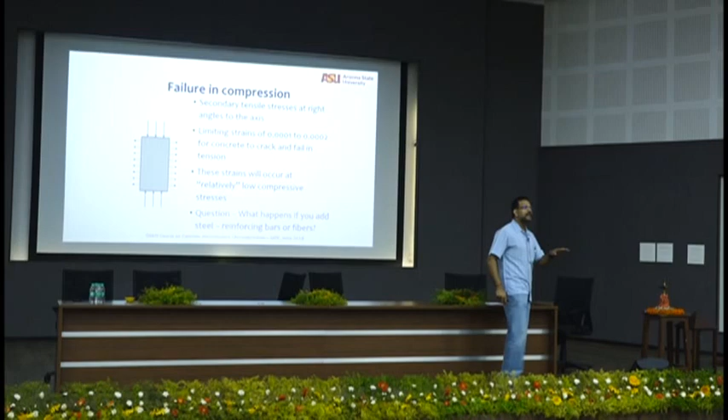Failure is not an average, so you don't say that. You say 'I failed in this course,' you don't say 'I failed in the semester.' If you have 8 courses and fail in only one, you fail locally. Some people have the talent to fail globally, but generally you fail locally, one by one. Then you fail this semester, next semester you have additional load to study, and the chances are you fail more because of that additional load. Same process happens. So failure is a local phenomenon, and that leads to my next point.

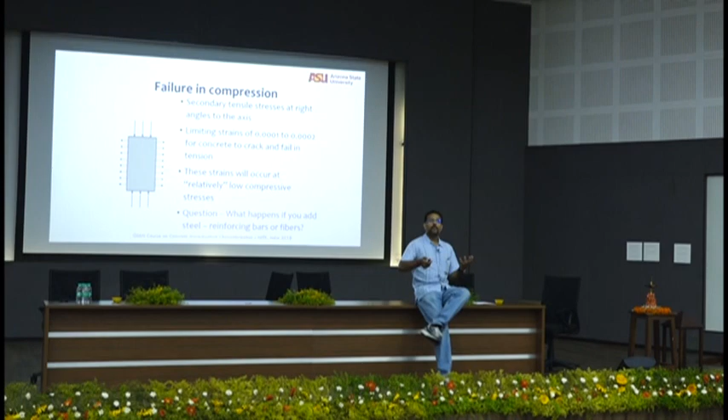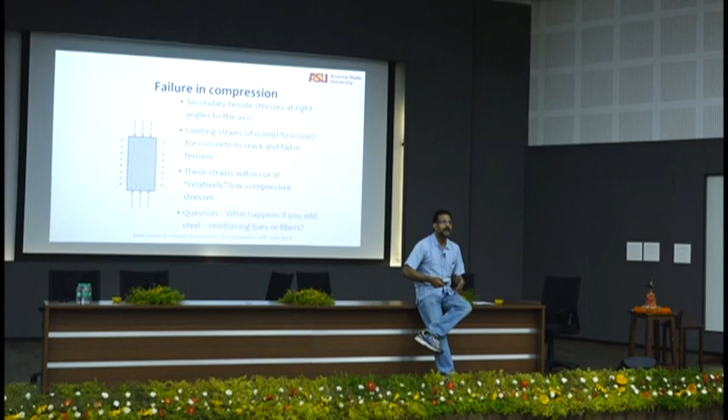Reinforcing bars or fibers are local strengthening agents. Fibers especially are local strengthening agents. What happens is micro cracks form in concrete. What a steel fiber will do is carry the load, disperse it so that the crack will not open and widen further. You will have an initial crack, but the fibers will start to carry the load instead of the concrete carrying the load. So understand this important point: failure is always local.

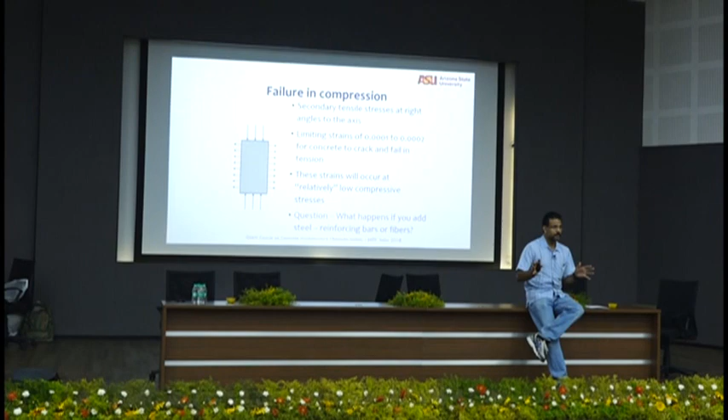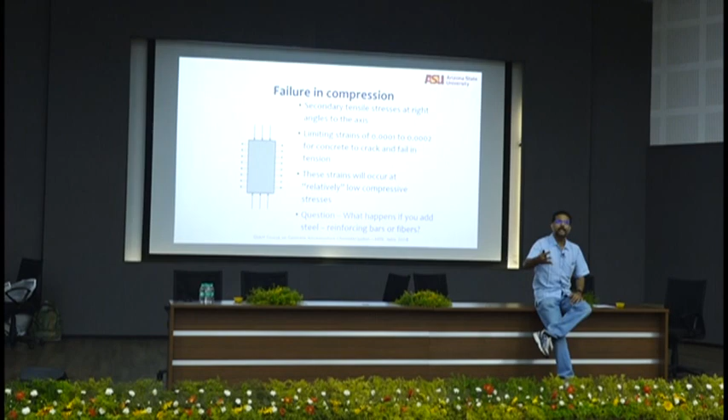Failure is never global, failure is local. Several localized failures coalesce to give what we perceive to be a global failure. And you cannot design for a global failure, therefore you have to design for a local failure, meaning controlling things at the local scale.

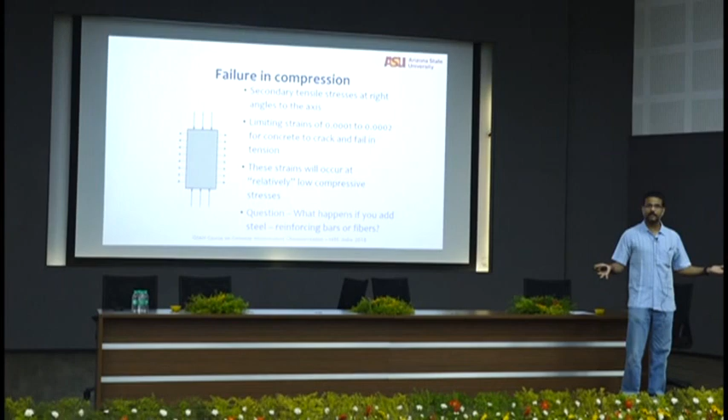What is local as far as concrete is concerned? If I look at concrete with my naked eye, what is local? Aggregates and cement paste. If I look at cement paste under a microscope, what is local? CSH and calcium hydroxide. If I look at CSH further under a transmission electron microscope, what is local? The layers of CSH. The definitions of local and global change.

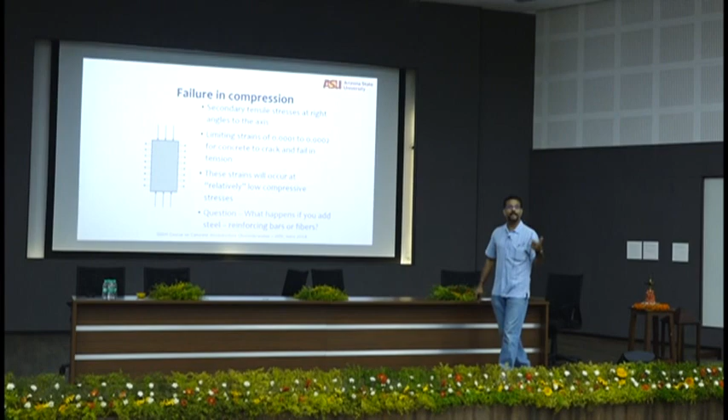For the government sitting in Delhi, the whole of Karnataka is local. For somebody in Bangalore, Mangalore is local. For somebody in Mangalore, this little part is local. Local and global depends on how you look at it. But failure is always local.

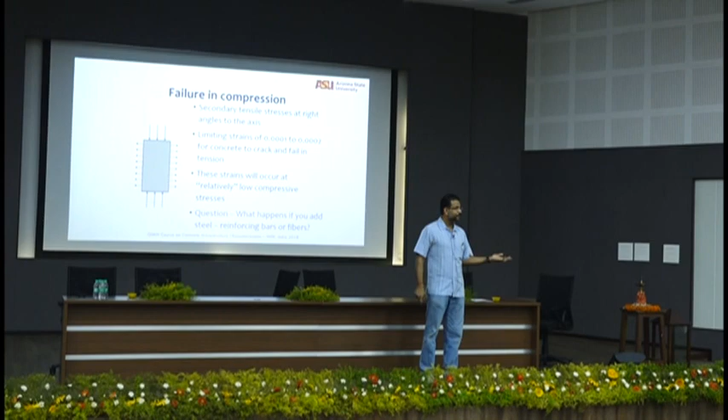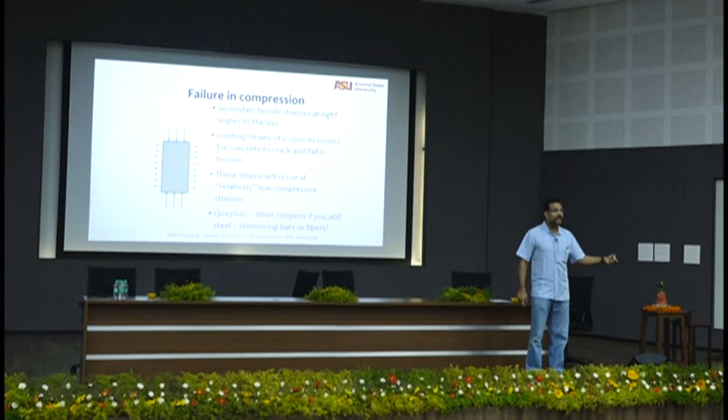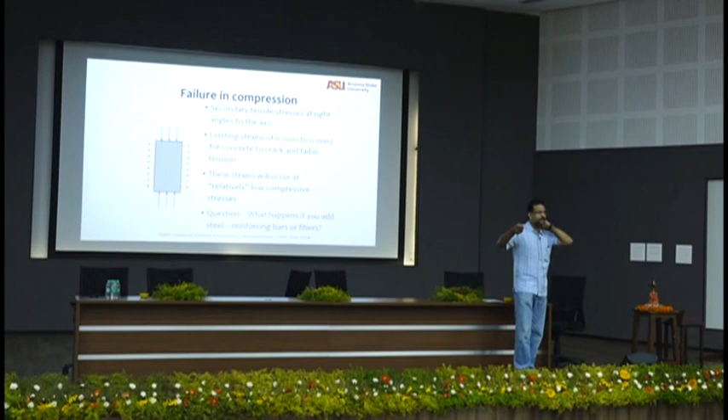So the more detail you can go into, the better you can capture the reasons for failure. Nobody really captures the reasons for failure. You'll see consultants come and look at a bridge deck and explain how it failed. They're all hypothesizing, and because they know a lot from history, they might be correct most of the time. But if you don't truly know what it is, you can't just say 'this is how it failed,' because failures are always local.

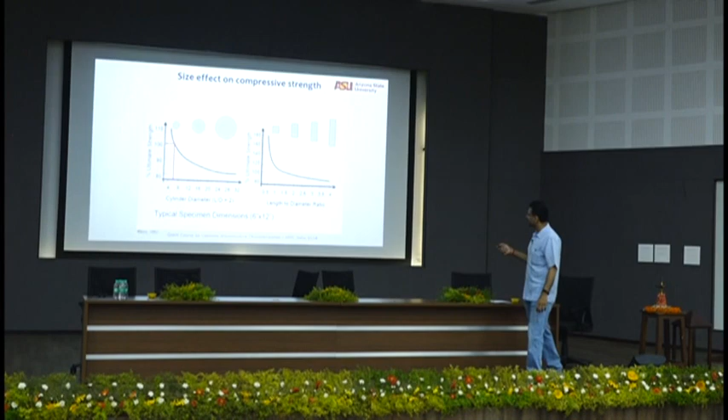Size effect on compressive strength: the larger you make your specimen, the weaker it gets. So your best option is to make a really tiny cube. What is the reason for that? Why does a 300 mm cylinder or cube show a lower strength than a 150 mm cube, which shows a lower strength than a 75 mm cube?

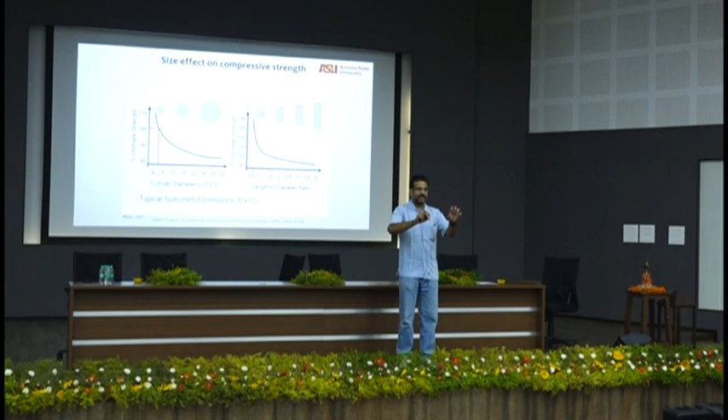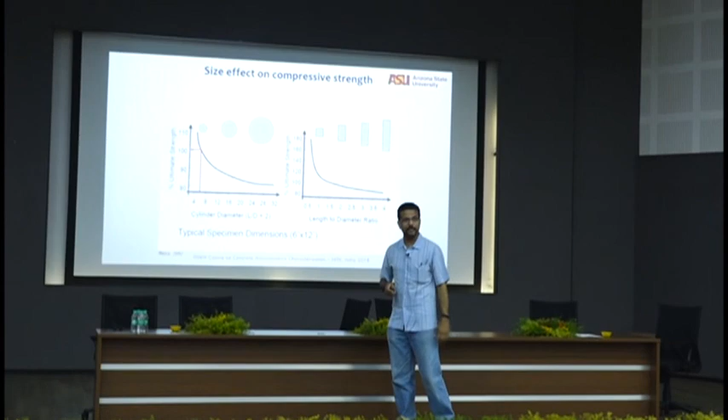Material defects. When you make larger and larger materials, the chances you have defects in that material are larger. If I could theoretically take atoms and connect them all together properly, I should have no size effect at all, and I should have the highest strength for that case, but that doesn't happen.

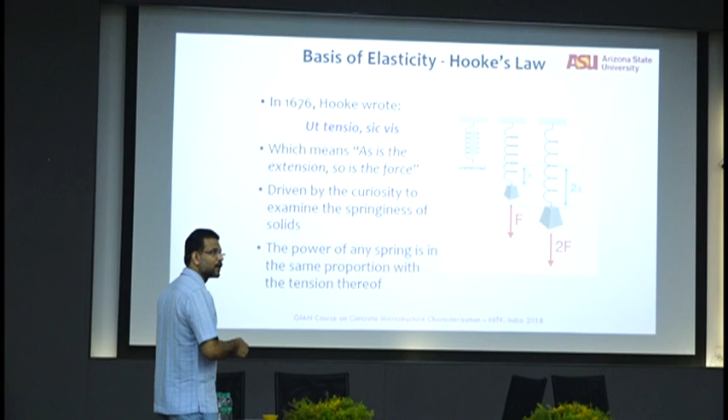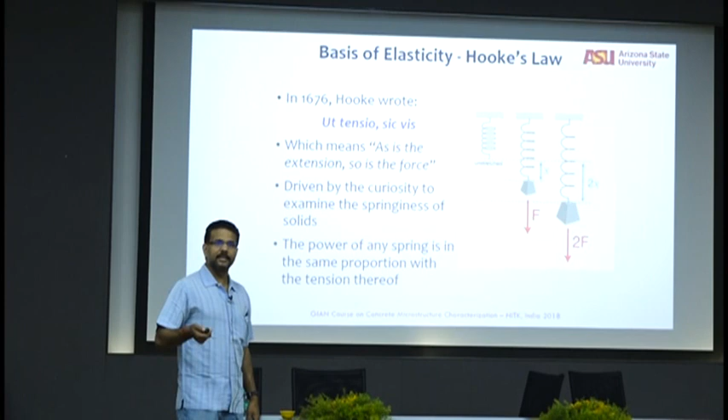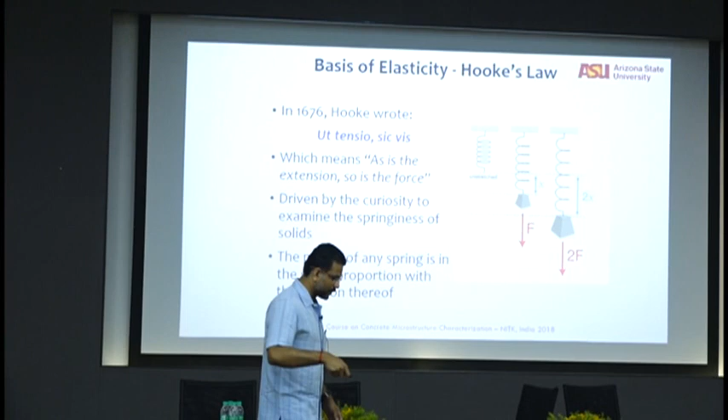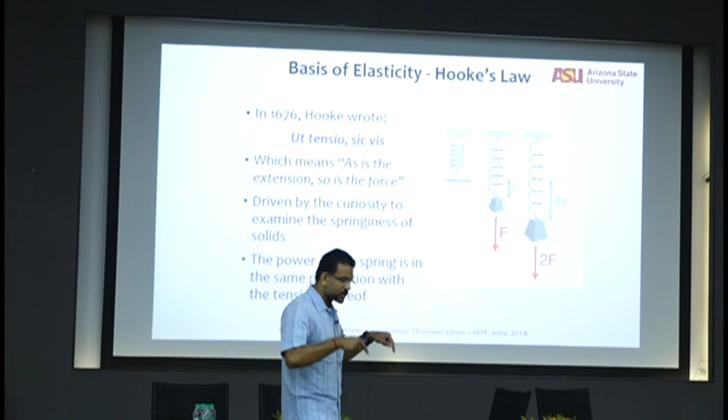Even when I say I am applying a load on this floor, I am not applying a load — because of my standing here, the floor is deforming, and because the floor has certain rigidity, it wants to oppose the deformation. That is the stress you see. Opposing the deformation is the cause of stress, not applying stress.

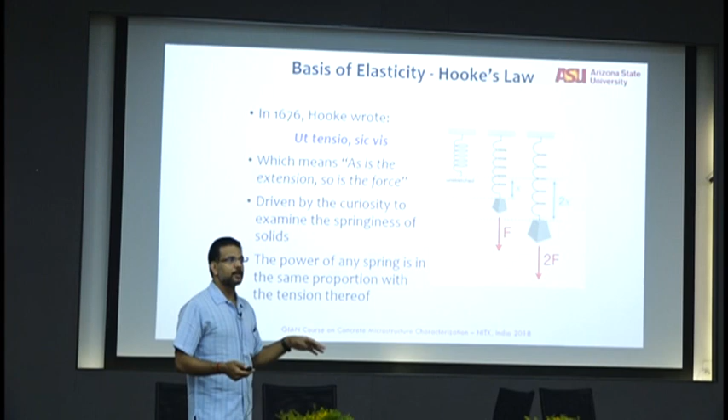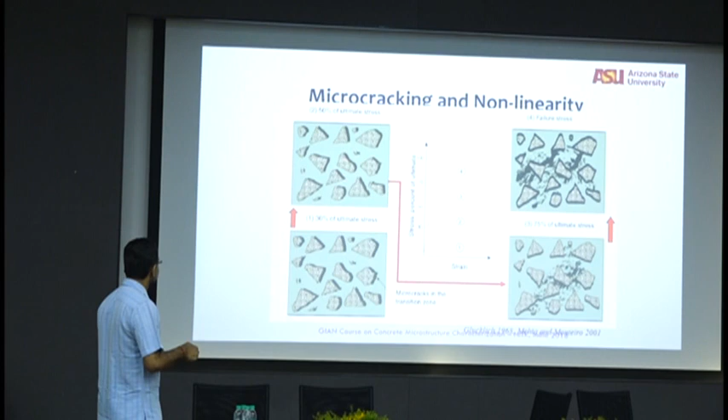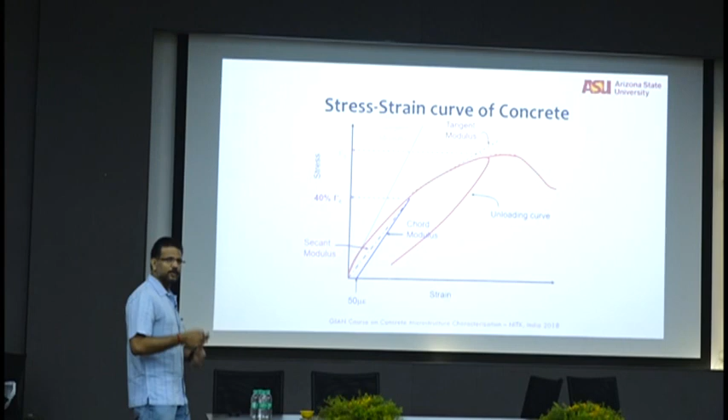Just some basic ideas so you don't mess it up anywhere. Again, you would have seen these pictures at a very low level. Even at the start, you have some micro cracks. Micro cracks start to expand, they become connected cracks, and failure occurs with a lot of these connections. You've seen these pictures over and over again — the stress-strain curve of concrete. All of you know secant modulus, tangent modulus, chord modulus, all the simple boring stuff.

Composite models for concrete — I'll give you these notes. These are just mathematical comforts that you can have.

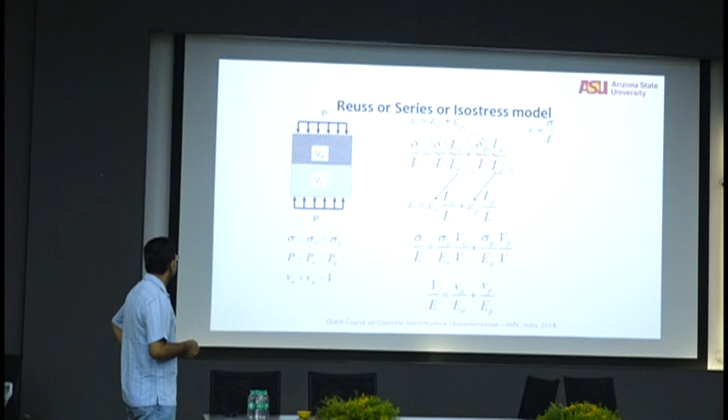Refined composite models. You can do a lot of nice models for concrete. Some of them work well.

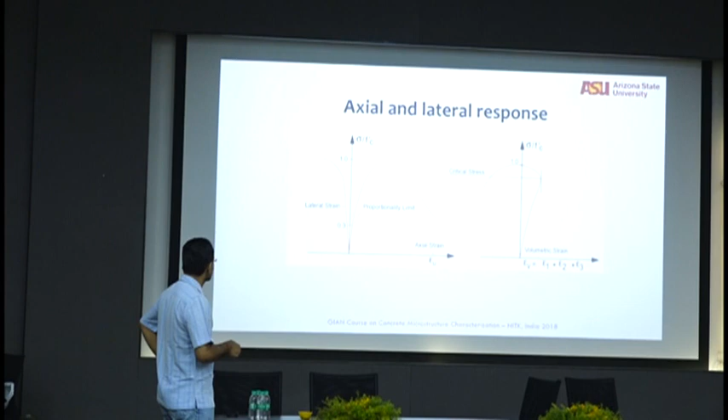Okay, axial and lateral response. So load versus axial strain gives you this curve. This is your proportionality limit, so look at how much nonlinearity you have. And this is your lateral strain. So lateral strain over longitudinal strain at the same stress level will give you your Poisson's ratio, as long as you are in the linear elastic range. So somewhere here, that's your Poisson's ratio.

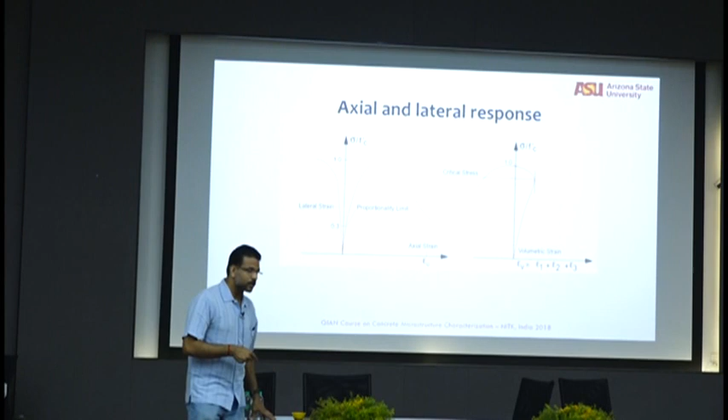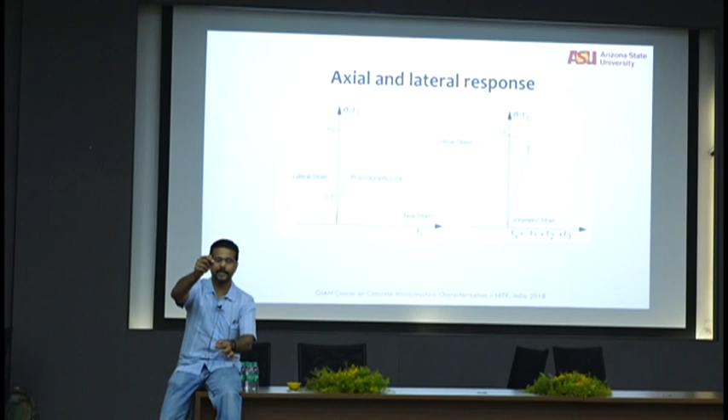Volumetric strain - I talked about strain being in volumes. When you measure strain, you measure a length change. You take it to the lab, put it under an extension comparator, and measure the length change. But in real life, concrete is a three-dimensional material, and when you push, you have strains in other directions also. Therefore, volumetric strains are more important. Volumetric strain is a sum of the strains in three orthogonal directions, not a product of the strains.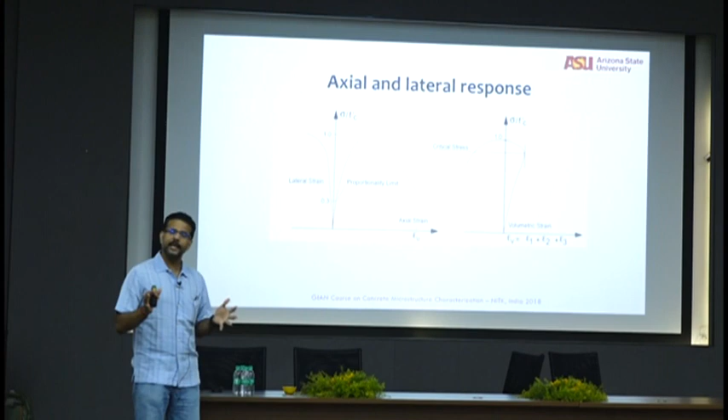So if you measure strains in x, y, and z directions, volumetric strain is the total additive value of all three strains, because volumetric strain is very important in shrinkage in real life - it's shrinking in all directions. So you have to look at volumetric shrinkage strain rather than linear shrinkage strain, because depending on the surface area to volume ratio, shrinkage in all directions might not be the same. So you take a linear strain, you might get some kind of an indication, but you will have strains in other directions also.

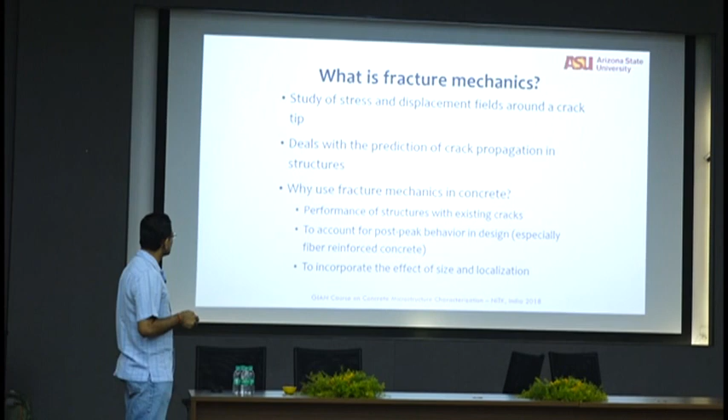Envelope of tension compression, testing for tension. I'll do a quick bit of fracture mechanics for concrete. Basically, what we rely on all the time - I'm not trying to say one method is better than the other. So there are people who are continuum lovers and people who are fracture lovers, and there's always a conflict between the continuum guys and the fracture guys. The continuum guys say that this is all a continuum, you can apply the uniform laws of physics to all of this and get it done, and that happens most of the time.

The fracture guys say no, failure is local. If failure is local, you have to account for local failure, and the local failure will have to dictate what stresses you have. Sometimes they converge, sometimes they diverge dramatically. There are certain cases - for example, if you do an aerospace composite design for an aircraft or a rocket, you always do a fracture-based design, because failure is local and that failure can cost very much. If you're doing a bridge deck or a road, forget it, cracks, move on. We know concrete cracks. I have a lot of these admixture companies manufacturing crack sealants - all these companies manufacturing hundreds of products that you can throw into all these cracks and seal the cracks and all of that. So move on, we wouldn't worry about it.

Again, it's a question of what the criticality of your problem is. Sometimes you want it to be a little bit more involved. So if you're doing fracture mechanics - typically when you say I apply a stress, when the stress exceeds the strength, the material fails, very simple: stress, strength, stress, strength. Whereas when you get to fracture mechanics, you say no, I apply a stress, I have no idea of strength, because I cannot say a strength, because strength changes from point to point. So when I say there is a certain strength, it applies to only that point. When you exceed that strength at that point, I fail there.

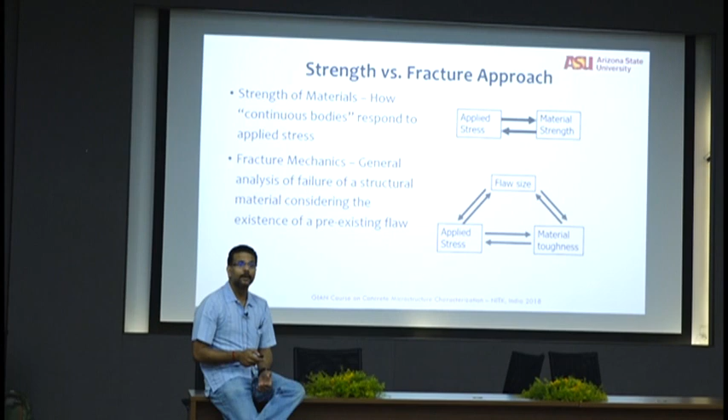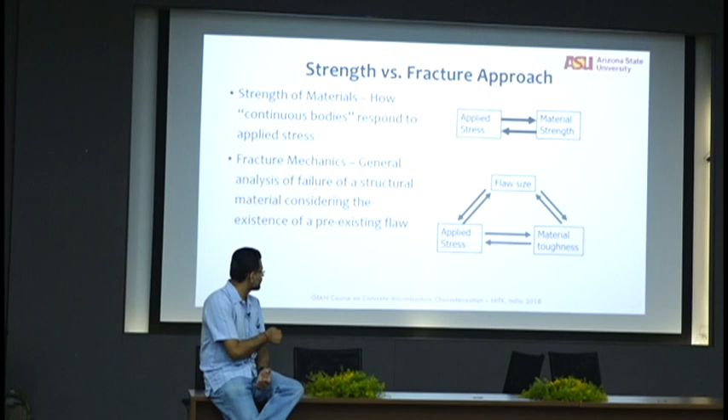So the global strength has no meaning. What you have is a material toughness. Toughness is a capacity to absorb energy - that is what is more important, and then the size of the defect. The larger the defect, the faster the failure; smaller defect, slower failure. So you have now a relationship between these three things when you do fracture mechanics.

The idea is crack size - you start with a certain design strength, and this is very common in concrete. You start with a certain design strength. After some time, you get here, like your director was saying on the first day - after some time, cracks increase and your strength drops down. But in some of the buildings here, this happened right here. That was what he was saying, right? Even before the building was open, it started to crack.

So sometimes that happens. But then under service, it cracks, and you figure out that okay, I can afford this - this is my highest expected load, and I can therefore expect that kind of a crack. Anything more than that, I will have in-service failure. What happens? You go seal the crack, fill the crack, repair the crack, try to take it back to some point here, crack goes - so you have this back and forth play here until you decide I don't use the structure anymore, I can demolish. So it's a function of how big the crack size is and what you think is required for failure.

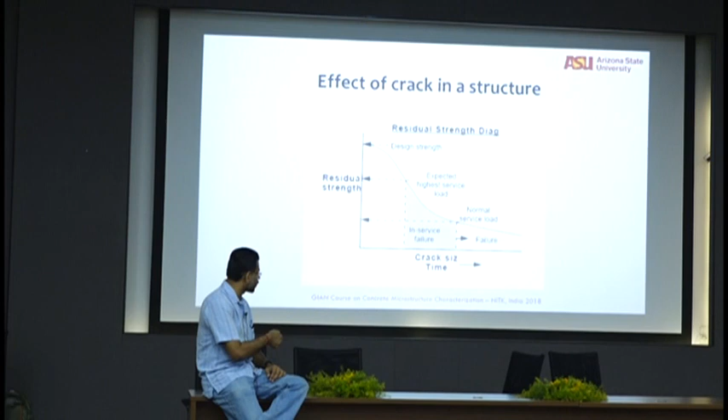So to give you an idea, if I take a circle, if I take an ellipse, and I pull this thing in tension, this is the local stress, that's the far field stress.

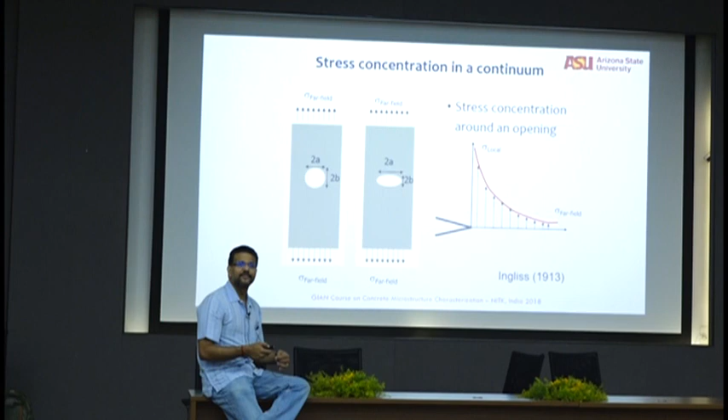See here, local stress is much higher than the far field stress. If I have a really narrow crack, a very sharp crack with the tip being just a point with almost zero radius, my stress at that tip will be theoretically infinity. Now infinity is also a mathematical construct—it just means very high compared to everything else, orders of magnitude high.

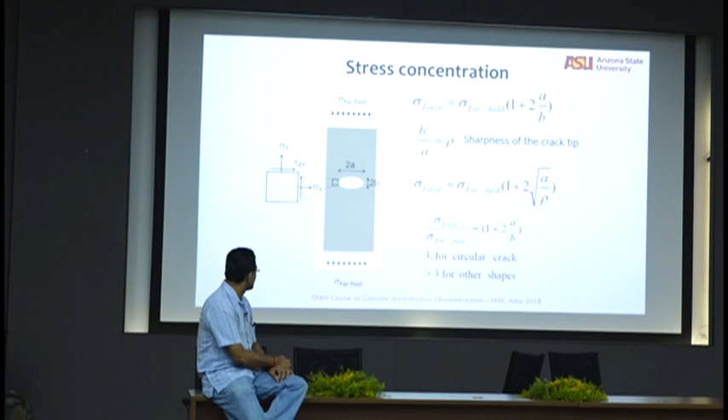You can prove that 3 is the optimal stress concentration factor you can get. That's what I was saying: if I have a circular crack, the regions around the crack will see 3 times the stress I apply.

So think about it. If I have a crack in the form of a circle in a concrete specimen, and I apply a tensile stress, the crack will see 3 times the stress, which means even if you are 3 times lower than the maximum strength, you have a chance of failure. One simple reason why, in ultimate strength design, you always use a factor of safety of 2 to 3.

Because you want to avoid that scenario. But now with limit state design, you have a lot of statistical increase in loads and reduction in strength that you account for, so you don't have to do that stress concentration calculation. The Griffith energy balance concept—we'll skip all of that.

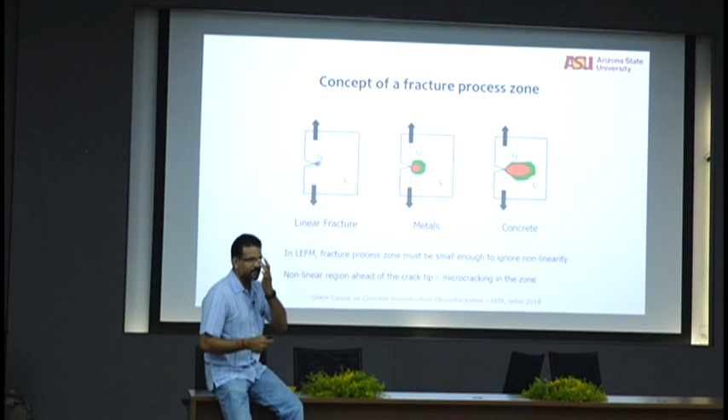Basically the concept: in concrete, you have something called a fracture process zone. This is a very nice concept. The crack needs energy to drive. You have a crack in the material, a micro crack, and that crack has to drive forward.

So think of a bridge, or a pavement, any structure you want. Load is constantly applied, there's always load in the structure. Initially say you have a crack—the load is nothing but the driving energy for the crack. Load or force multiplied by the distance the force moves the point you're considering gives you energy, or work.

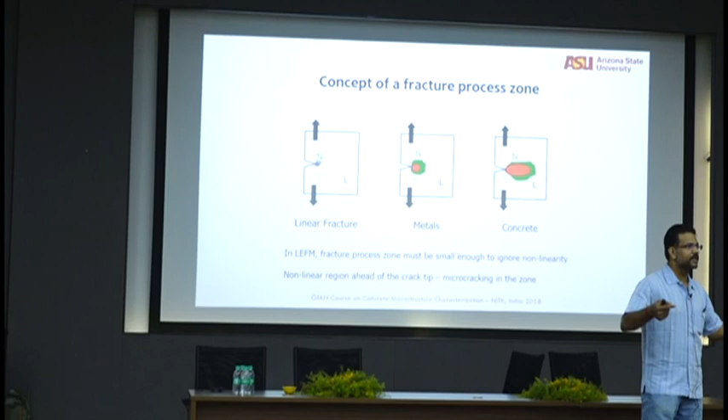That energy is nothing but what we call the strain energy stored in the material—internal strain energy. The release of that internal strain energy happens when it cracks. So if I take a piece of paper, let me see if I can tear this here.

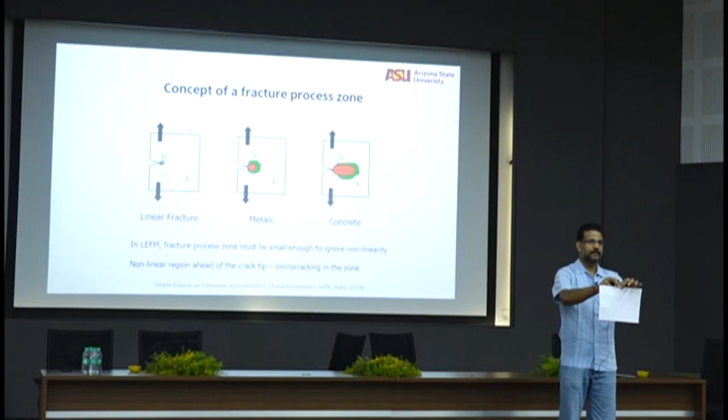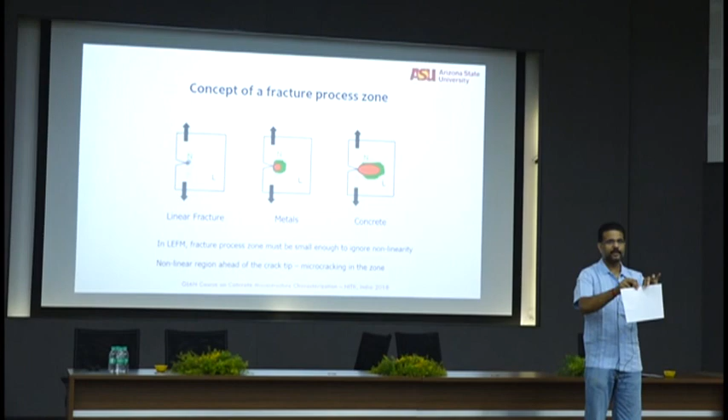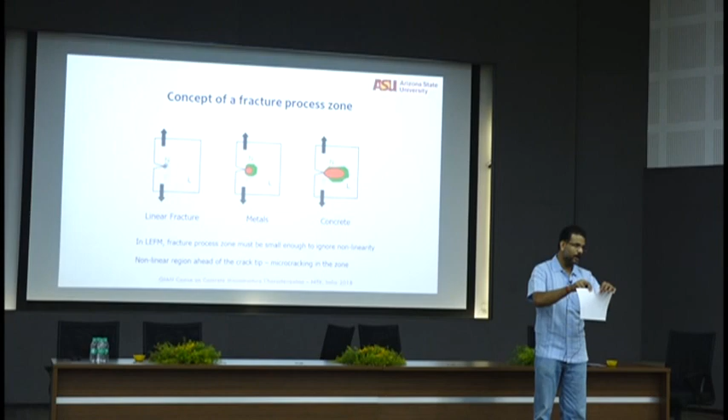If you close your eyes, you still know I'm tearing this paper, right? How? You heard the sound. What is happening? The internal strain energy stored in this paper is being released as heat and sound. There's actually a slight increase in temperature when I do this, though we can't measure it because it's so small—but basically the internal strain energy stored is being released as heat and sound.

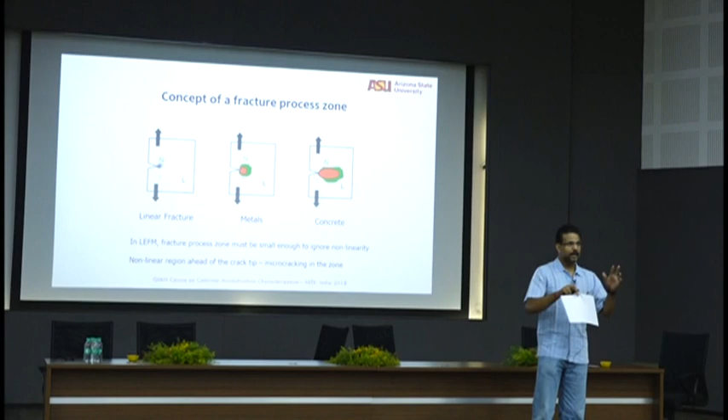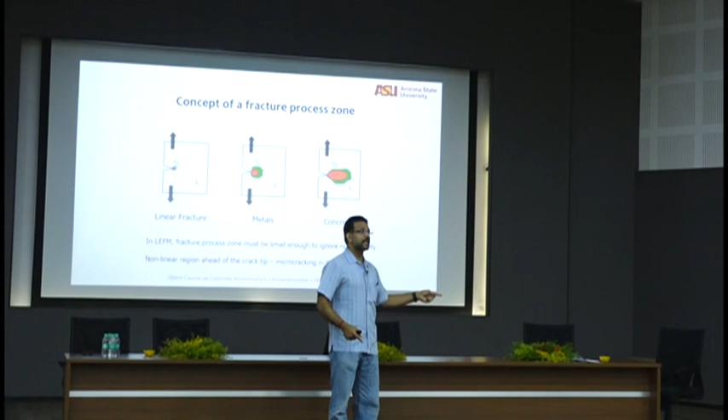That is what is happening. You know the principle of conservation of energy: energy cannot be created nor destroyed. Which means if this energy is being released outside, the material should have had that energy stored.

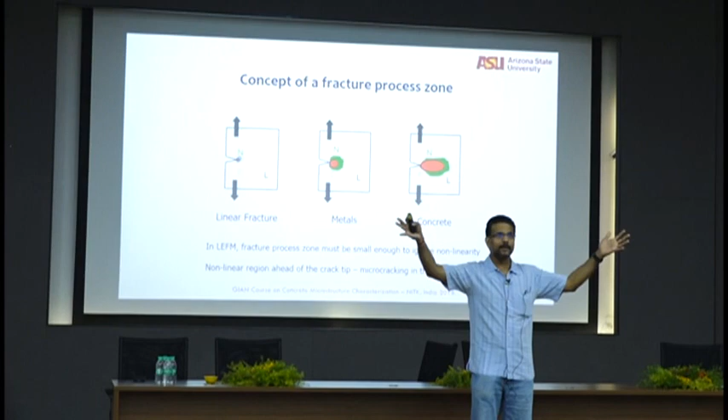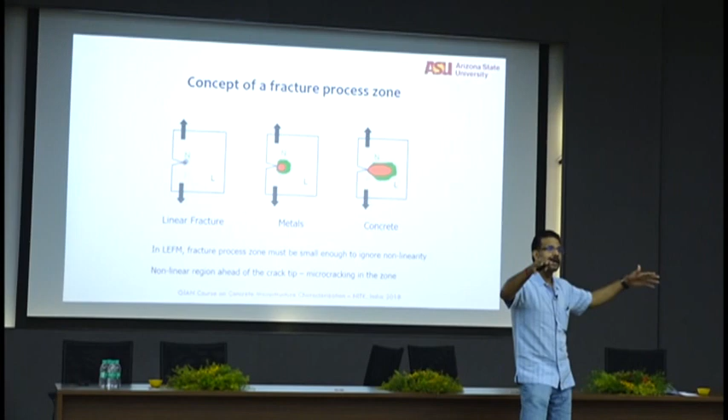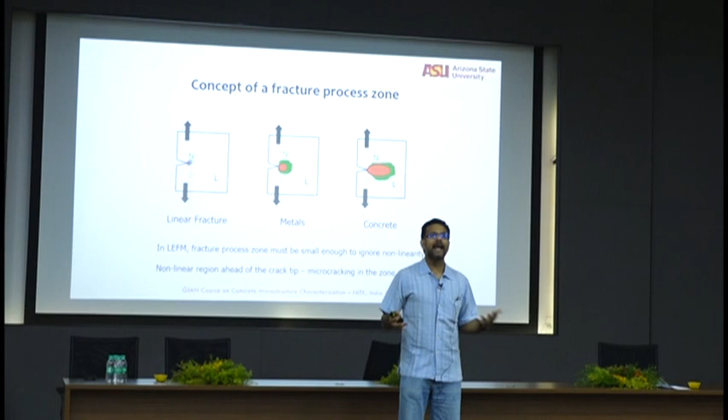So anytime you load a material—remember, if this building has concrete columns and there is load on it, they are storing energy because of the load. They are in the shape you see them and not failing because they have the capacity to store that energy. Once the capacity to store energy is exceeded, energy has to be released in some form, and typically that's why when things explode and fail, you hear a noise—because it is the internal strain energy stored as internal work that's being released.

So when the crack drives, when the crack goes—that's a global view. Now think local: you have a crack, under load the crack is propagating. But the crack doesn't have a highway, it has to spend energy.

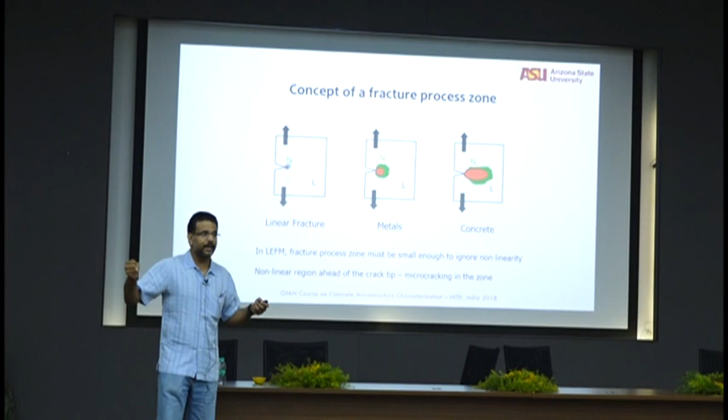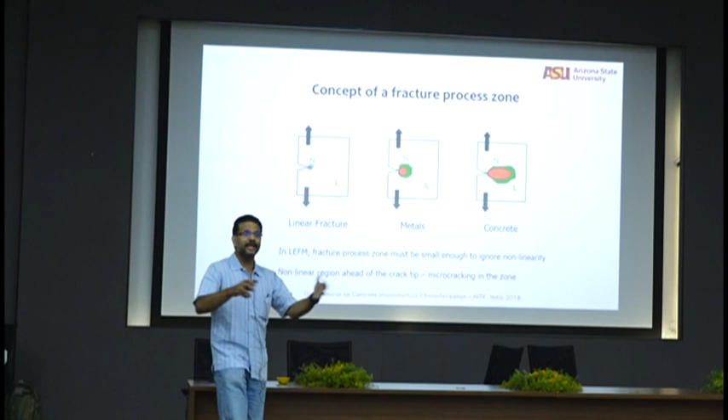The crack is like a cab driver in Bombay trying to squeeze his car between two other cars, pushing those cars forward and back. The crack is finding a space to go through. Crack growth also follows all the energy principles we talked about, the most important being: nature is designed to be lazy.

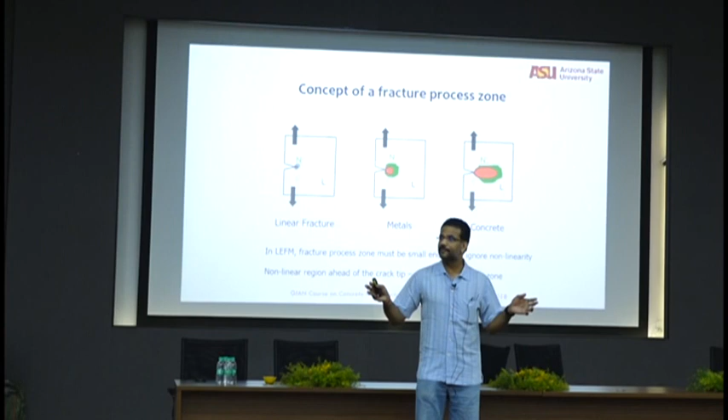That's the most important energy principle. If you don't want to really read the law of thermodynamics, this is a simple explanation of it: everything is designed to be lazy, you follow the path of least resistance. Cracks do that too—when they encounter a really hard aggregate, they say, I don't have the power to break this guy, but I can go around. Like traffic jams where you divert.

I may have to go more, but that is a good thing for you as a concrete engineer because you have made that crack lose its energy. Energy is a finite quantity, and it is coming from the internal stored energy. Now you've made it dissipate that energy, so it has to work hard to create more energy to crack further. This means you have artificially blunted a crack. The crack needs energy to go through, and when it goes through, it distributes its energy around.

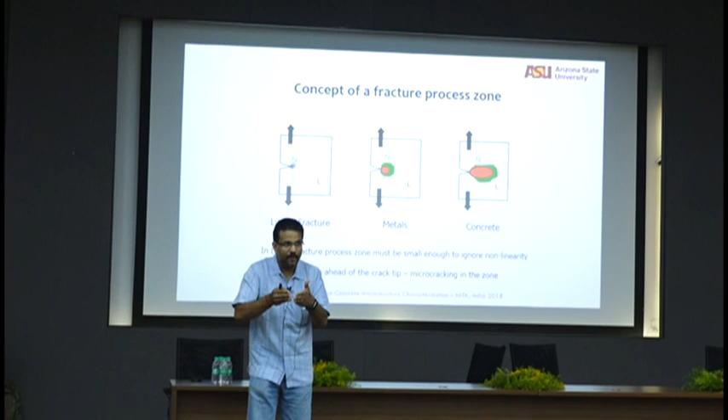So what happens is you have local strains. I'll show you some nice pictures where local strains can be captured. When a crack goes through concrete, it has to move, which means you have localized displacement of those points. So you create a zone called the fracture process zone in concrete, where you have very high localized strains.

If I follow the path of localized strains, and I have a very strong instrument that can follow that path, I can predict where the crack is going even before the crack has gone there. Is that not a great tool to predict the life of a structure? I'll show you some examples.

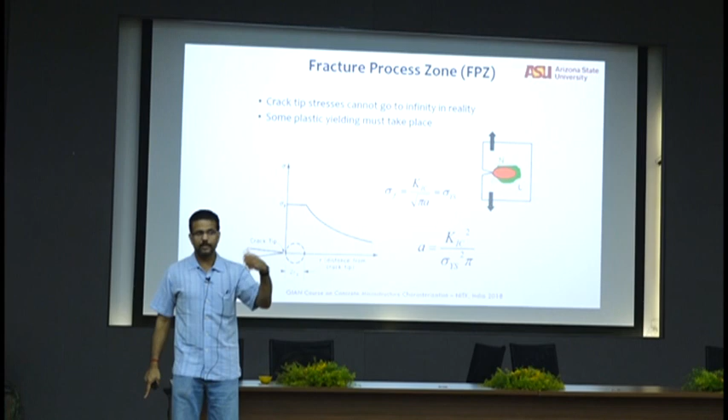So now, since I know this is cracking, you intentionally put a notch to introduce cracking. But once you know that, you know where the crack is going through localized strain intensities, even before the strain differences have translated into cracks. That zone where you have high intensity strain is called the fracture process zone, which just means the process of fracture is happening in that zone. It is an indication that something is happening there.

You look at temperature differences to see if something is about to happen. Have you heard about the volcano constantly erupting in Hawaii now? You've seen pictures of that in the newspaper. They do thermal imaging to find out under which part the lava is hottest, so they can predict which part of the volcano it will come out of.

Compared to them, we have a very simple problem. You know which bridge you want to look at; they don't know where they have to look. They have to do aerial imaging of a very large area and a lot of image analysis to figure out the most likely location where it will crack, because they have to evacuate people. You can't just say everybody within a 15-mile radius should evacuate. You have to find out exactly where to ask people to evacuate so you do it carefully.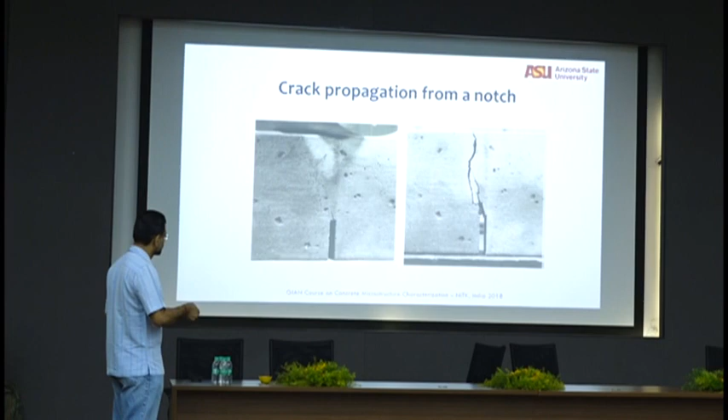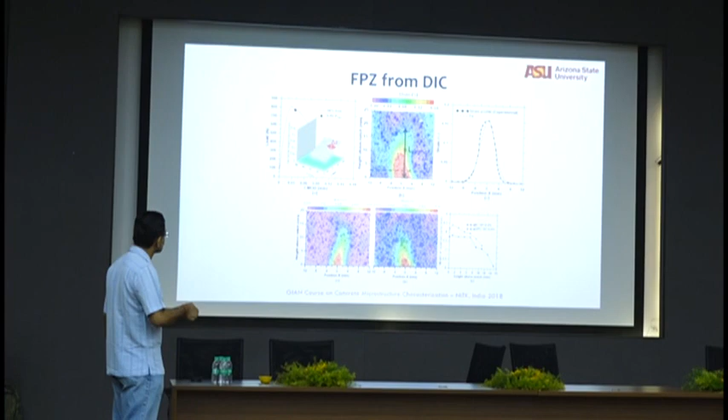This is the center part. 0,0 is the tip of the notch, right at this point, where the crack will start. You see at different times extremely high strain intensity under different loads. This is under a load at that point, close to peak, showing how the crack has propagated and the intensity of strains around it.

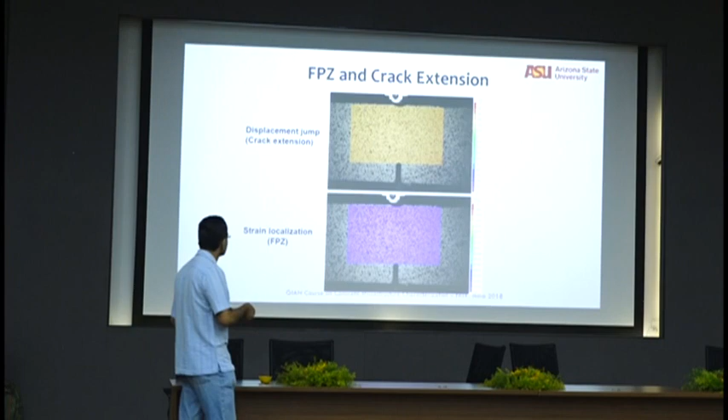There's another picture of how the crack is growing at different times. That's how you can observe crack extension; it's kind of a laboratory technique. There are some companies trying to bring in sophisticated instrumentation that you can put on ready-made platforms to investigate real-life structures for crack propagation and crack extension. It's still some years away, but it's a nice tool to actually predict where your structure is going to fail, based on the idea of localized strain index. Any questions on this?

That's pretty much the mechanical properties that we will cover—again, a very quick overview relating what's happening at the microstructure level to what happens at the larger scale.

Any questions? In high strength concrete, the crack passes through the aggregate. Very high strength concrete, yes—the paste is much stronger than the aggregate, so the crack passes through the aggregate.

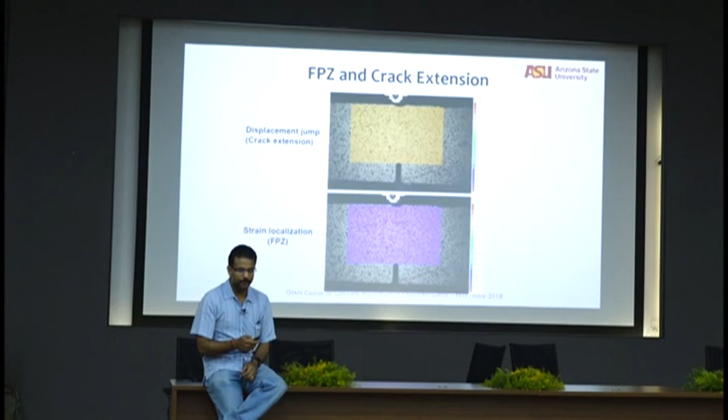Other questions? Okay, so the last topic, quickly on durability. I have a bunch of different things on durability—what do you want me to cover more? There's alkali aggregate reaction, sulfate attack, corrosion—what do you want? Corrosion? Corrosion? Everybody wants corrosion? Really? Why? It's not a concrete problem, it's a steel problem, and I'm not teaching you steel.

So sulfate attack now? Everybody wants everything, right? Okay, if overwhelmingly it's corrosion, we'll do corrosion. If overwhelmingly it's sulfate attack, that's what I'll do. Corrosion for everyone? No? Steel?

We'll do corrosion. For anybody who wants sulfate attack, or has other questions on sulfate attack, we'll do that at the end. I'll do corrosion because, in terms of the scale of the problem, the intensity of the problem, and how much money is being drained out of everyone's pocket, including all the taxpayers, corrosion becomes a very important problem. I'll give you all these notes, and there will be a PDF of all these on the GIAN website apparently, so you will lose nothing. So we'll start with corrosion.

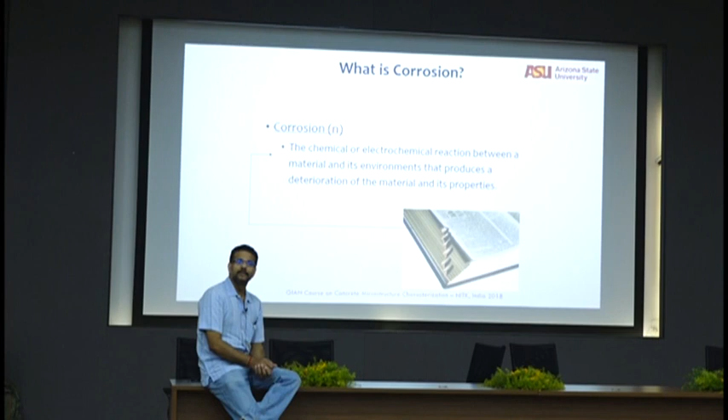It's basically an electrochemical problem, a dissimilar metal in a solution issue. Concrete is a pool of solution as far as metal is concerned. Normally metals in any other environment deal with whatever is the local corroding species. Now coming to concrete, steel has to see every possible type of species, and you'll have to learn how to deal with it.

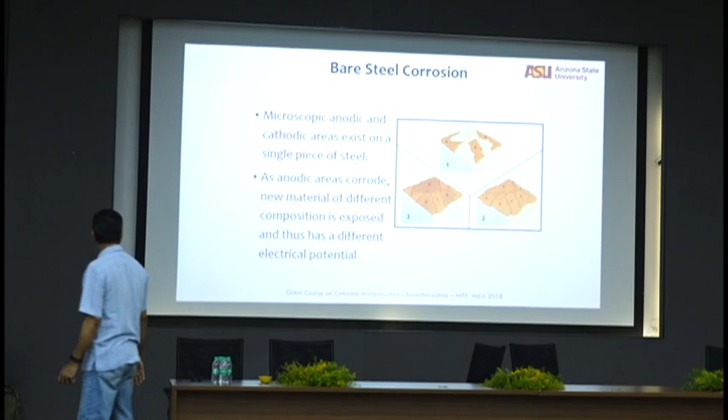All of you know the basic issues of corrosion, what happens with anodic and cathodic areas. You remember, right? Anode loses electrons, cathode gains electrons. If you know that, that's pretty much what's in corrosion. Now the specifics are very different.

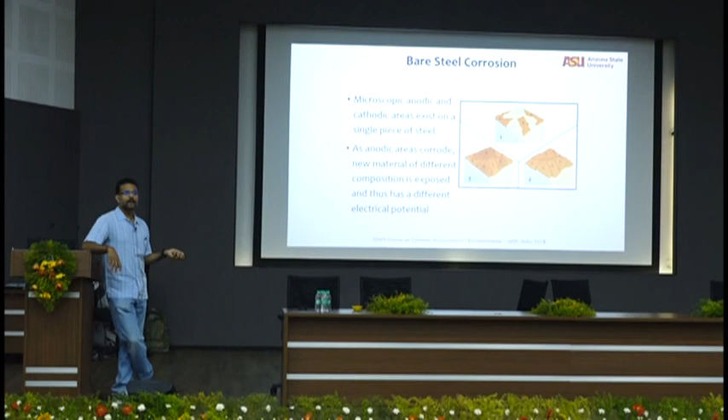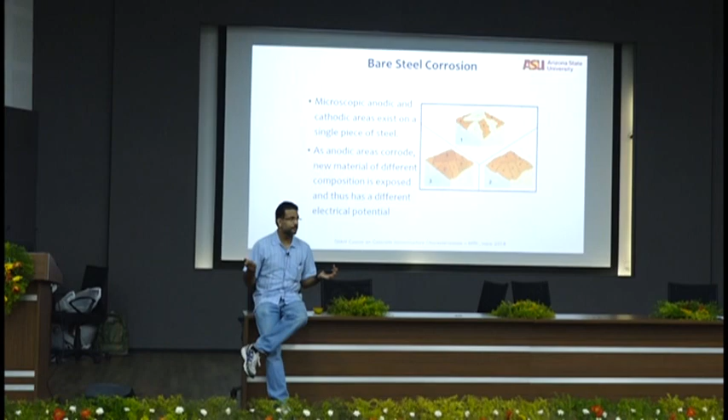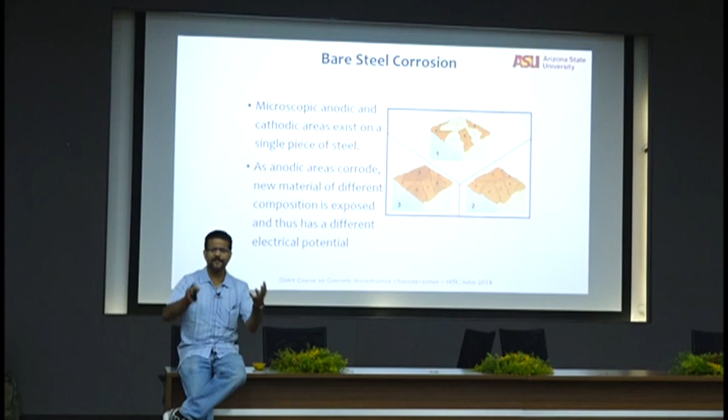We still have not been able to solve corrosion problems because of several reasons. So let's do the big picture, the 30,000 feet view first. Why are we not able to solve the problem of corrosion of steel in concrete? If somebody asks you this question, as civil engineers who have seen corrosion all over, what will be your answer? We have spent so much money in research. Every institute you can see, somebody is doing research in corrosion, whether it's good, bad, or ugly. Why haven't we even come closer to completely understanding the problem? Let's forget about solving it. What is it that's so important in corrosion that everybody seems to trip on at the last minute? What do you think causes corrosion?

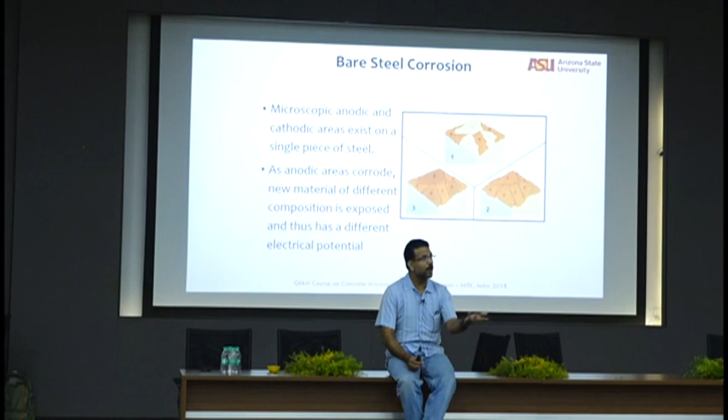Porosity in concrete is one reason, okay? Now, is there a way to control the porosity in concrete completely? No, we can make it better. We talked over the last 4 days about how to make it better. What else? Where does porosity come from? From water, lack of filling in the space. If that is the only reason for porosity, if space not being filled efficiently is the only reason for corrosion, I gave you enough tools, and I'm not the first one to say that. A lot of people have given enough tools to fill the space efficiently. Why are we still having corrosion?

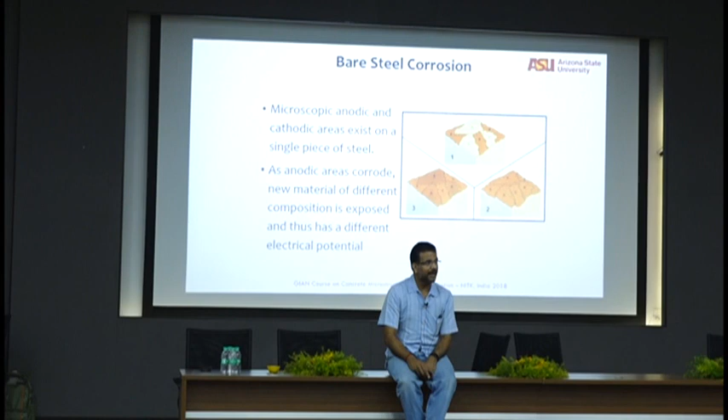Maintenance, but even before that something has happened. Passive coating - you have to think even further back, before the structure is even built. Environment - we keep blaming everything environmental, things you have no control over. You say you want concrete with no porosity - are you ever going to get it? No. You blame the environment. Are you going to control the environment in this place? No. Go back. What is it that you can do?

You don't protect the steel enough. Go back some more. You don't design the structures properly in the first place. Structural design - the structural designer doesn't talk to the architect, doesn't talk to the concrete engineer, doesn't talk to the contractor in the field. Finally, they talk only when they have to point fingers at each other. This has to start from design.

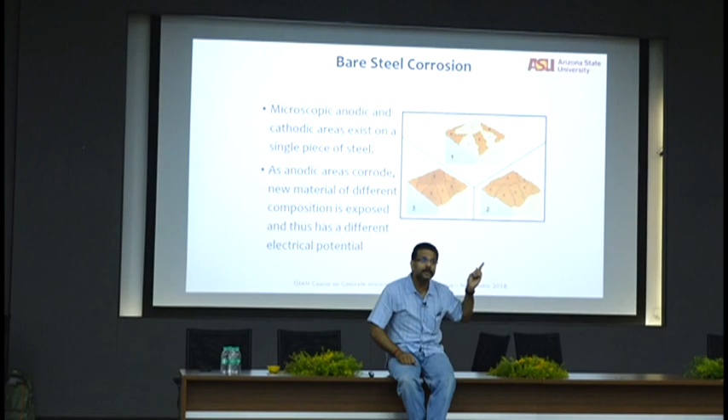I cannot design a marine structure the same way as I design a structure in the desert. Period. I cannot. I've been telling this to everybody that I can see. You cannot be designing buildings like this in this place with such heavy rainfall where everything is exposed. When you have lunch and it's raining, you can see water falling through the face of all these columns in this building. You cannot design like that and then expect not to have corrosion.